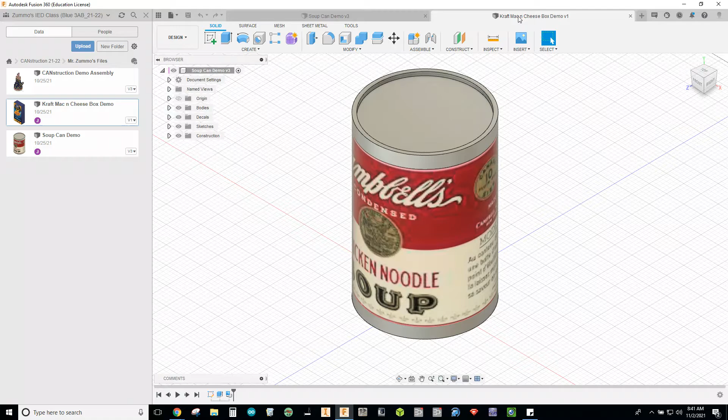On the screen right now, I have a standard Campbell's soup can, and on my other tab here, I have a Kraft mac and cheese box. These parts are really simple to make, and one thing that we can do to dress them up and make them look more realistic is grab an image offline and apply them to these objects as a decal. So that's ultimately what we're going to do to get these parts looking a little bit more realistic.

I was able to find all of these standardized dimensions on the internet. I have a website linked in the CANstruction document that has resources for the different can sizes. There's a very standardized approach to sizing of cans, and they're listed by number. So a number 300 can or a number 303 can are the most commonly used out there in the packaging world, and those are the dimensions I used to create this can.

And then for the Kraft mac and cheese box, I actually just pulled this up right off of Walmart's website. If you just Google Kraft mac and cheese dimensions, it came right up on the first website, which was from Walmart. I was able to grab the numbers from there.

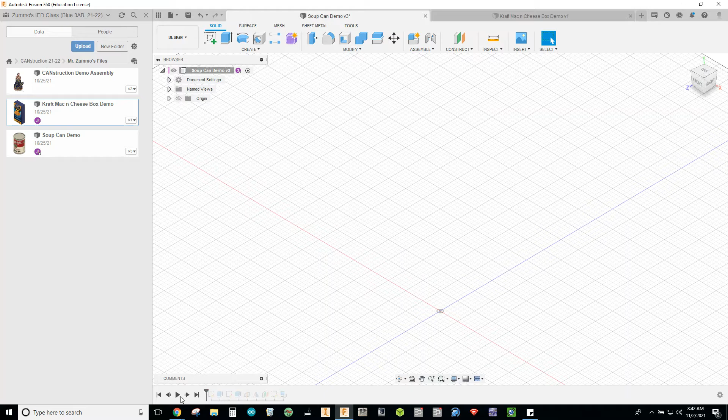Just to kind of review the process for creating this part: first, we're going to make a sketch of a circle and extrude that up. That's going to get our diameter and the height of the object set for us. From there, I'll make a sketch on top and extrude cut down into that surface on the top, just to give us a lip, which again makes it look more realistic.

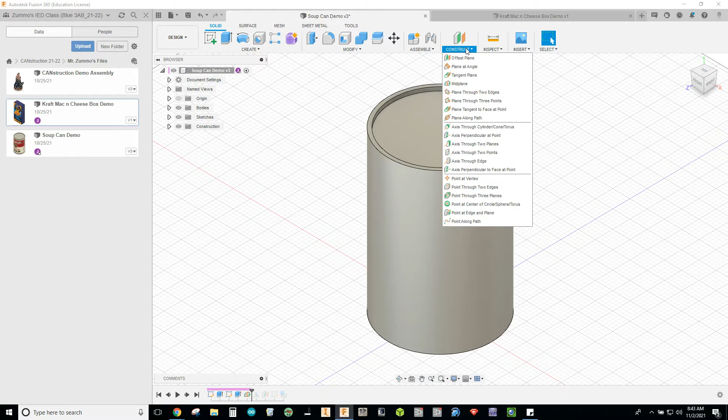I'd like to do that on the bottom too. I could just make another sketch, flip it over, and extrude cut up into the part, but I have the mirror feature, so I wanted to use that instead. You can see I put a plane, a mid-plane between two surfaces. Underneath Construct, you can do a mid-plane between two surfaces—just click the top and the bottom, and it goes right through the center of the part.

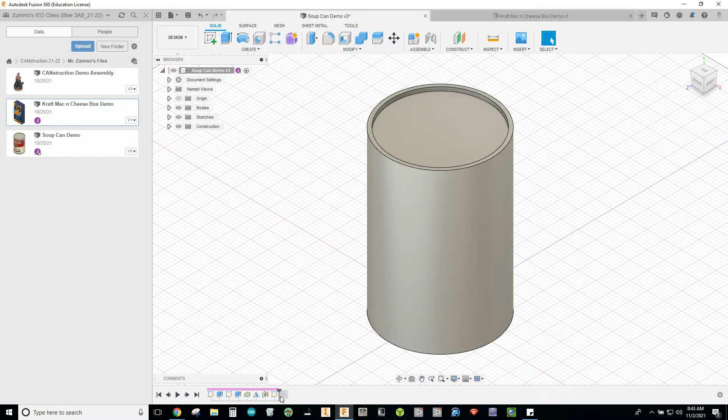With that plane, I was able to mirror over that extrusion and the cut on the top down onto the bottom. Then I just had to make one more plane out in front of the object so that I can put a sketch on that plane and ultimately bring in my image, decal it, and wrap it to the face of the can.

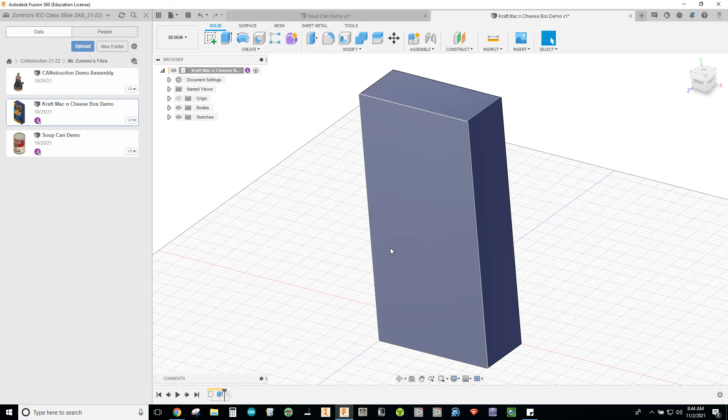Same kind of approach for the Kraft mac and cheese box, except there's even less steps. I just made a sketch for the rectangular shape for the height and width of the box, extruded it for the depth of the box, and then made an additional sketch on the front, brought the image in, and superimposed it onto the front of the rectangular shape.

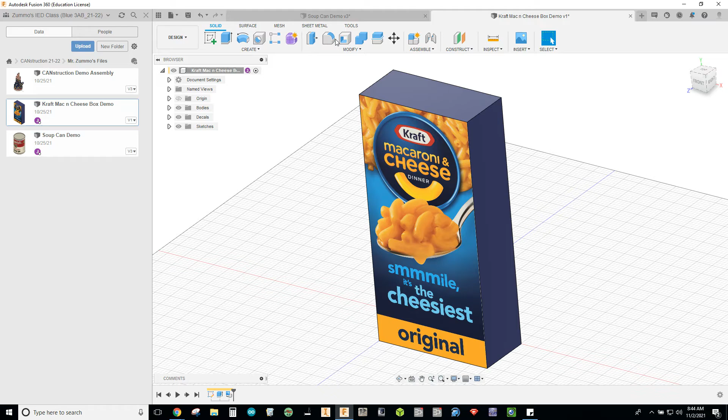In addition to that, you can play around with generating your own appearances and colors. You can actually generate the RGB codes right from these images while setting up a new appearance. That's a whole other aspect you can get into just to match the colors and help things look even more realistic.

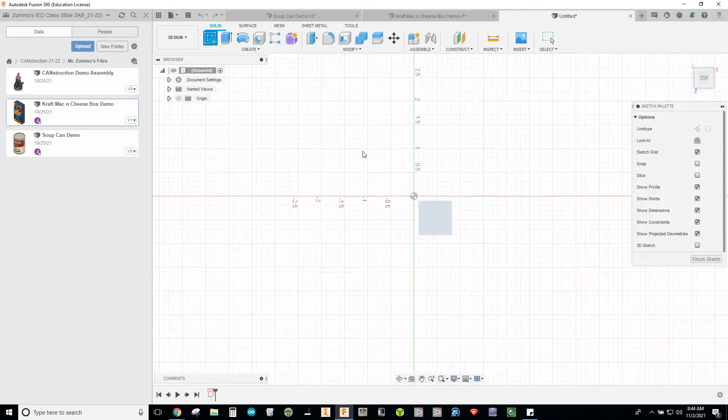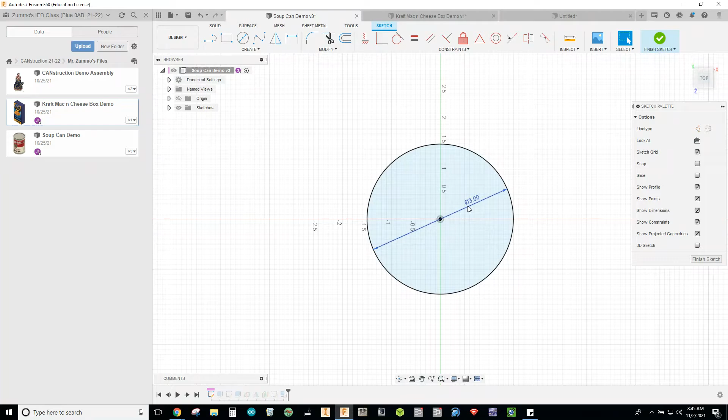So to begin, let me go back to my soup can demo here. I'll go File, New Design, and make a sketch on this plane. Grab my circle tool, always use the origin, drag out from here, click again to place that, and grab my dimension tool. I'll grab the outer edge of that circle, place the dimension, and jump back and forth to reference my numbers. If I open up my sketch here, that was exactly a 3-inch diameter, so I'll mimic that on this file—a 3-inch diameter—and finish sketch.

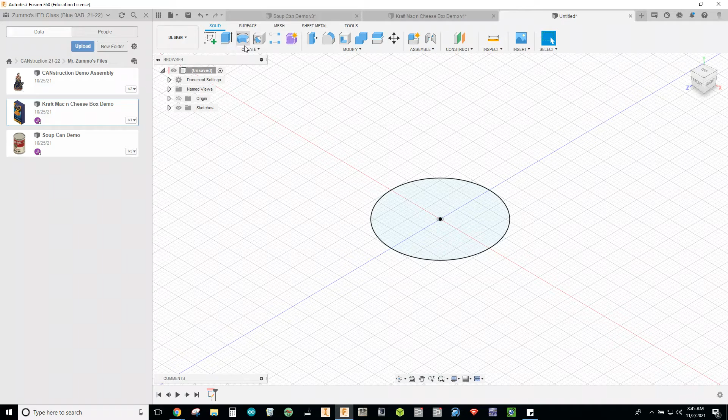Now I'm going to extrude that up. Again, I'll go back over to my other tab and reference my extrusion value here of 4.5 inches. So same thing—extrude 4.5 inches going up.

Then I'll make a new sketch on the top of this surface, grab my circle tool again. You could do it this way and dimension it out—we just want that lip to be about 0.1. Since it was a 3-inch diameter, you can just say 2.9, and that would get you to what you need.

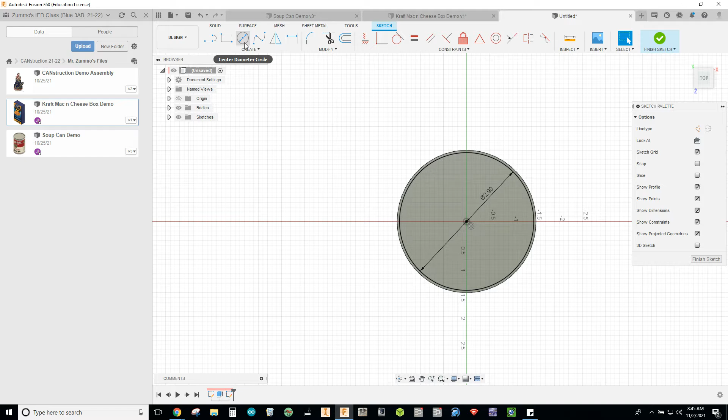Another option is we could just use offset here instead—grab that outer ring and offset it in 0.1 of an inch. At this rate though, I'm just going to finish sketch, and now I'm going to extrude cut that down into the part, just negative 0.1. Make sure the operation is set to cut and it removes it away.

Next, I will create that midplane that we discussed. So midplane, grab the top, grab the bottom, puts a plane right through the center here now, and that would allow me to use my mirror feature.

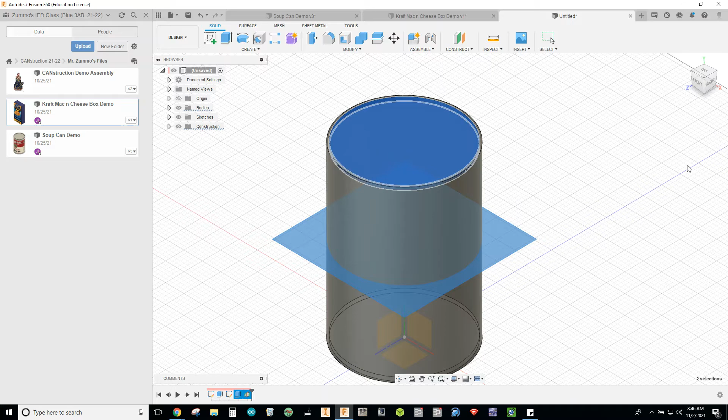So down here under create, we go to mirror. For the type, you want to set it to features, and the feature would be my extrusion. I'm actually going to grab it from the list down here, and then just switch over to select the mirror plane, grab the mirror plane, and say OK. I'm just going to rotate and see. Should have a cut on both sides now.

Very good. At this point, I don't need that plane to be visible anymore. I could turn the visibility off for that and just hide it.

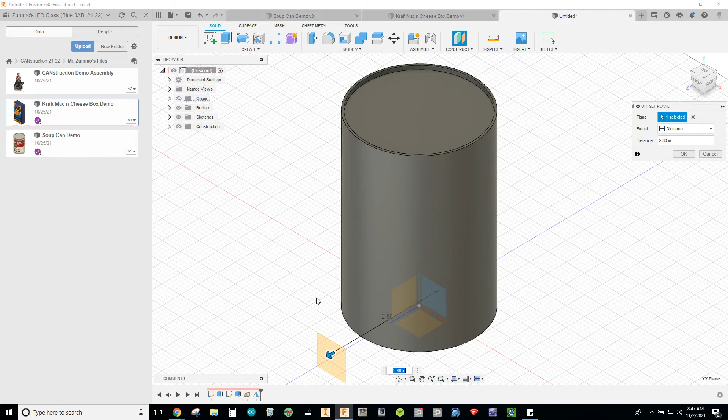And then last thing is I need a new plane out in front so I can bring an image in and then decal it and wrap it to the face. So I'll go to construct, offset plane. Just going to select this plane here and then make sure that my new plane is out in front of the object. Say OK to that.

Start a new sketch on this plane. And then this is where you see insert, and you can grab an image, and actually you can just go right into decal with this. So just say insert decal.

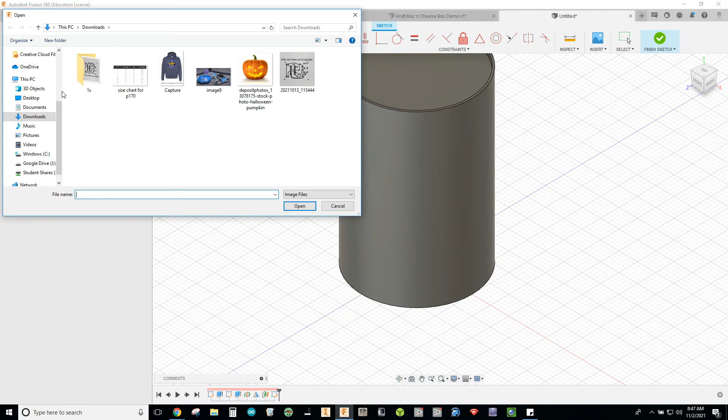And you want to find the image, and you just go on the internet, find a good one that works for you, and then download that. I should have it in my downloads. There we go. Campbell's soup label.

And then it says, what face do I want to wrap that to? So I'll just select the cylindrical face here. You can see the image goes right into the part.

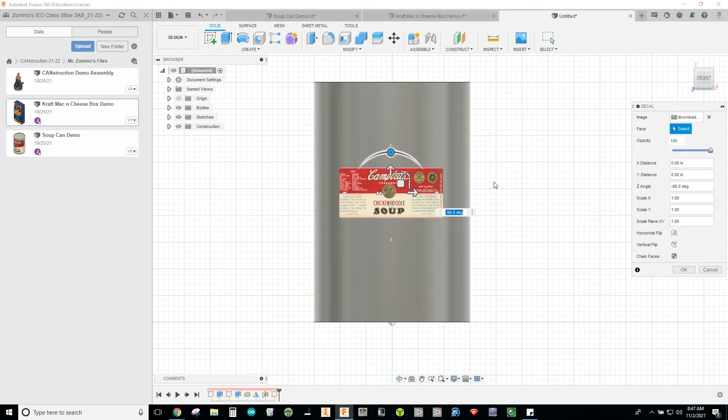I just have to do a little bit of cleanup here and rotation. So I'm going to rotate that negative 90 degrees as it is. And then I can grab this corner and scale the image out. I just want to try to fit it to the height as best as I can.

I notice that it starts to warp the image in certain locations, so I just have to play around with it a little bit, reposition it, drag it up a little more. Just try to get it to fit the part as best you can.

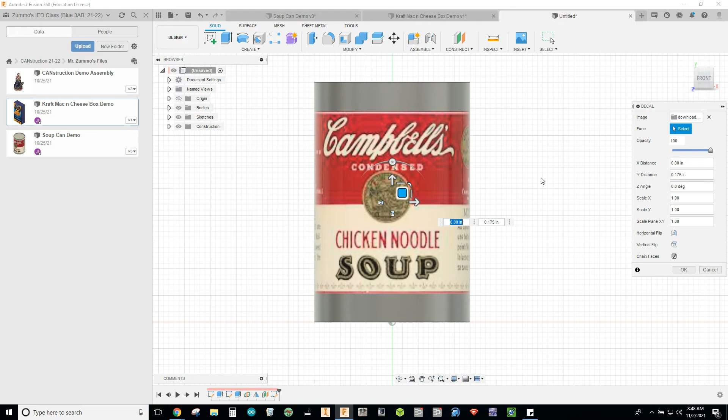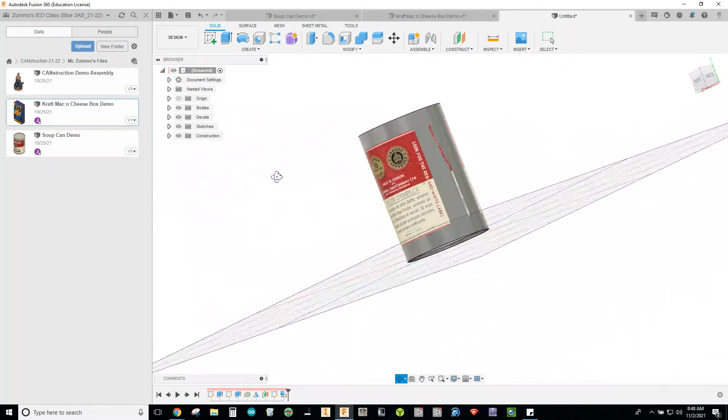And I know on the backside it doesn't really do a great job of meeting the gaps there. If you play around with it some more, as you saw on this example, I guess I didn't show you yet, I do have it meeting on the backside, but there is that line between the image, and I haven't gotten to the point where I can figure out exactly why it does that, but for all intents and purposes, this would be fine. Get a label on there.

It's looking more realistic. And then lastly, you just want to set your physical material for this. And since most cans are made from aluminum, that's what we should apply.

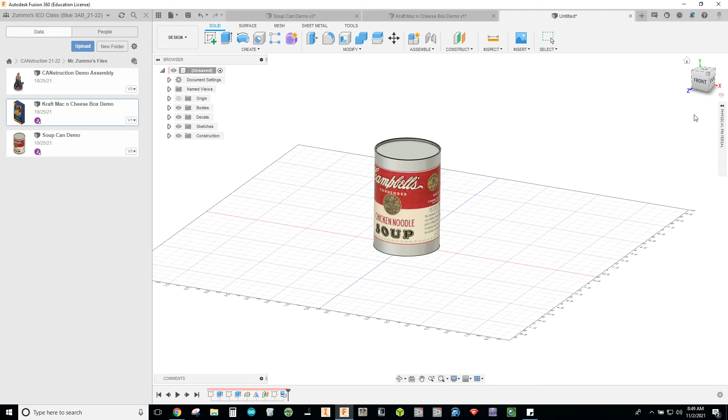Go into the metal folder, have aluminum here. Just going to drag that out onto the part. So now it did change it to a little bit of a brighter gray, and it should now inherit the physical properties of aluminum. This part is done.

What I want to do is just say File, Save. As you're getting into saving, make sure that you are part of our CANstruction project folder. And in that project folder, I have 4 additional folders for us, or I will have additional folders for us. I have under CANstruction, if I just click back here, my files for my demos.

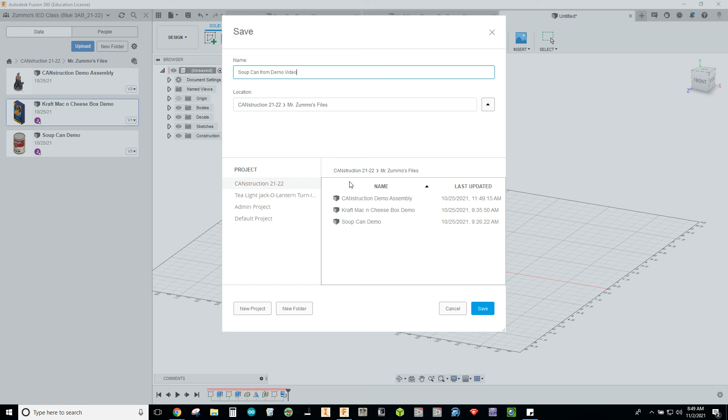And then I know we have 2 projects determined already, the grandfather clock and the infinity gauntlet hand. So I have folders waiting for them. We'll get 2 other folders in here for my other groups once they are ready as well. So I'm just going to title this Soup Can from Demo Video, just so I remember which one this is. In the correct location, click Save.

And for the Kraft mac and cheese box, I don't feel like I need to go through that entire process again. I'll just double click my sketch here and show you what I did. The height dimension was 7.15. The width was 3.52. I finished that sketch.

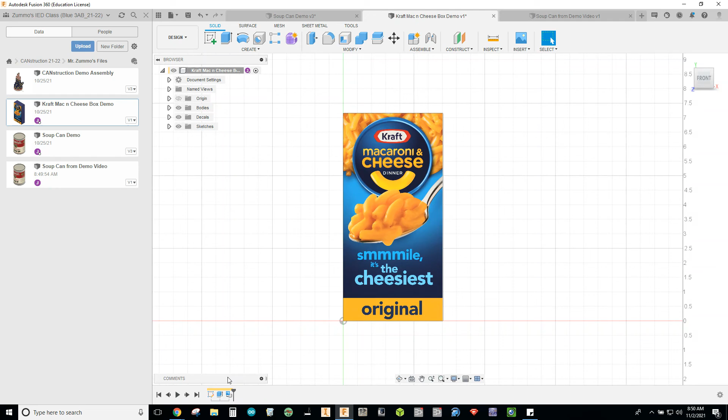I then extruded it out towards the front at 1.58. Again, those 3 dimensions were right from Walmart's website. I know every box can be a little different, so whichever ones you end up finding and using is what you kind of want to stick with for your design here.

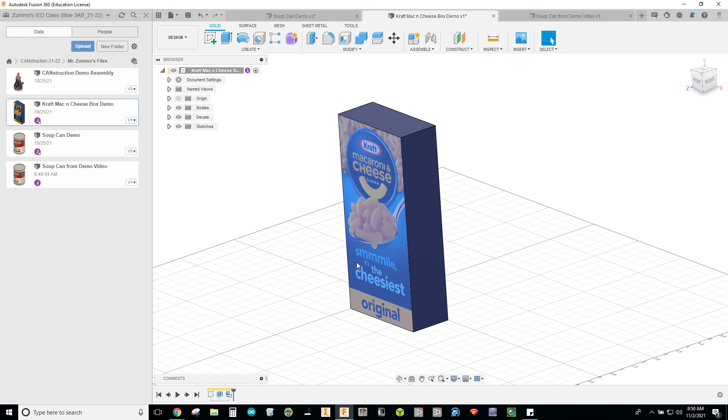All right, after I extruded it, same basic process then. I just made a sketch right on that surface and then brought in the decal, found my mac and cheese image that I liked on Google Images, and that was it.

So hopefully this demo helps get you folks started in creating your part files for today. If you do have something that's more intricate than what I've shown, of course, ask and let me know. I mean, anything is possible, right? So we can make it happen. I hope you enjoy the video. Look forward to the next one.